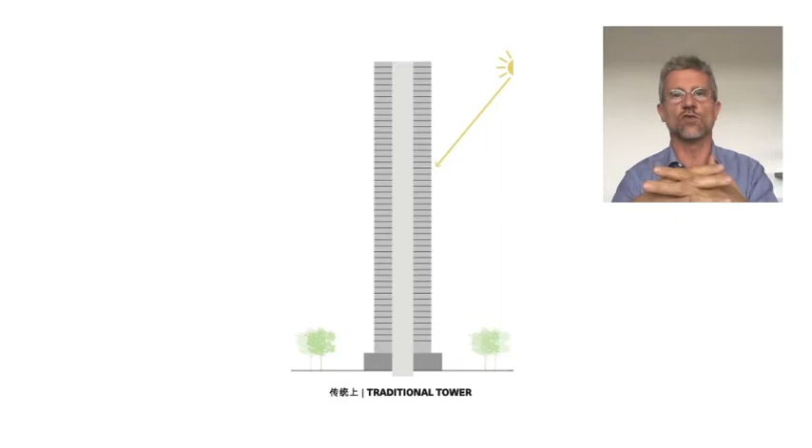We are so happy to have had the opportunity to do this project in Shenzhen. Shenzhen is the city of innovation, Shenzhen is the city of technology and nature, and all of this converges into our skyscraper. A skyscraper which is unique in the world.

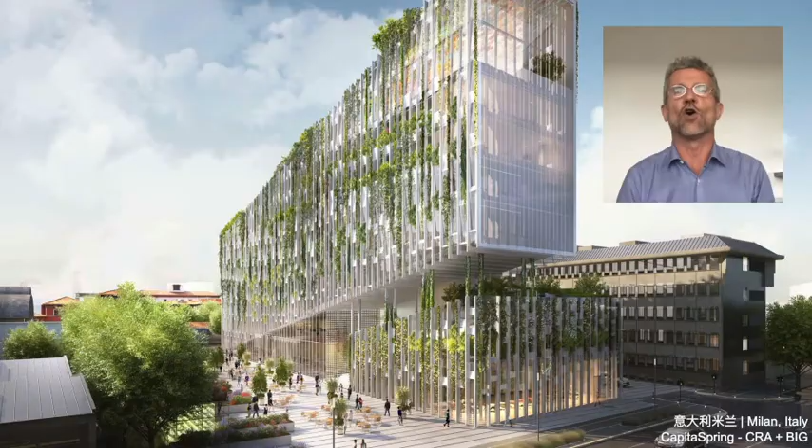It will be able to produce food for over 40,000 people. A skyscraper that's also feasible. It's related to a lot of the projects we've been doing around the world, in Singapore, in Milan, in New York, and so could really become tomorrow an icon for Shenzhen of the future.

WUmart's JIAN MU Tower, as the sacred world tree located in the axis between Earth and Heaven, will be strategically completing Futian CBD's central axis and skyline with an innovative green building. It integrates in the main axis and represents a new attractive magnet on the green network of the CBD, becoming a new destination for both citizens and tourists.

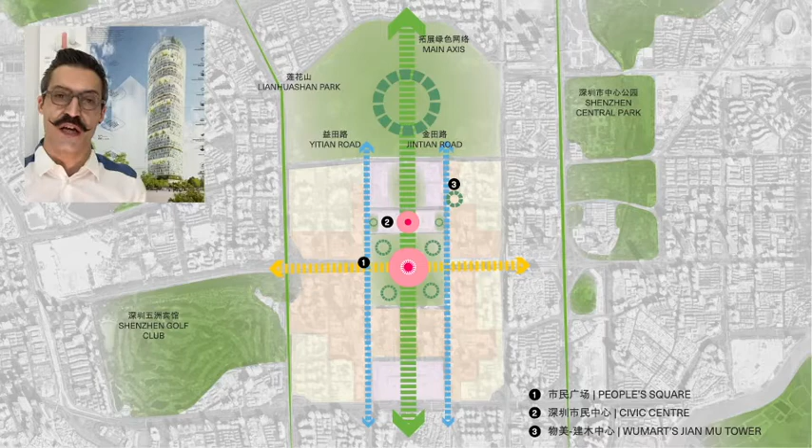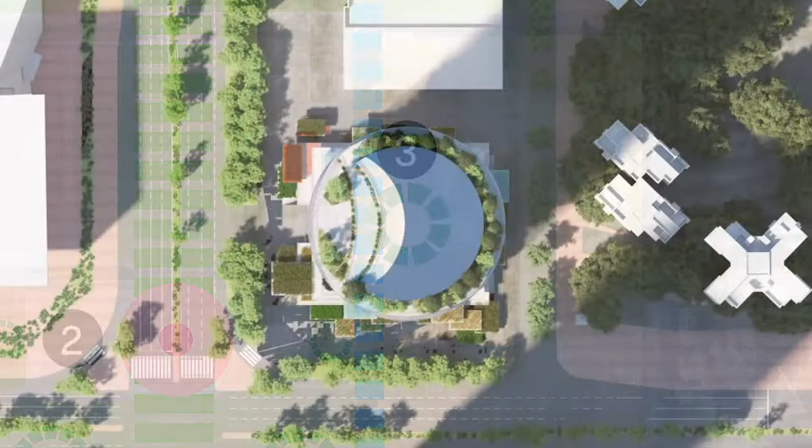It is located on the eastern side of the central axis, in proximity of the civic center, right behind the MOCAPE and a series of public facilities. Therefore, the importance of generating a high-quality public space and a flawless accessibility from any direction.

The project's name is inspired by one of the sacred trees described in the Classic of Mountains and Seas, known as Shan Hai Jing, where it is described as a tree that connects earth and heaven. In Chinese tradition, earth is represented as a square and heaven as a circle.

In our JIAN MU Tower, the shape mutates from a square footprint at the base into a circular open space while growing towards the sky.

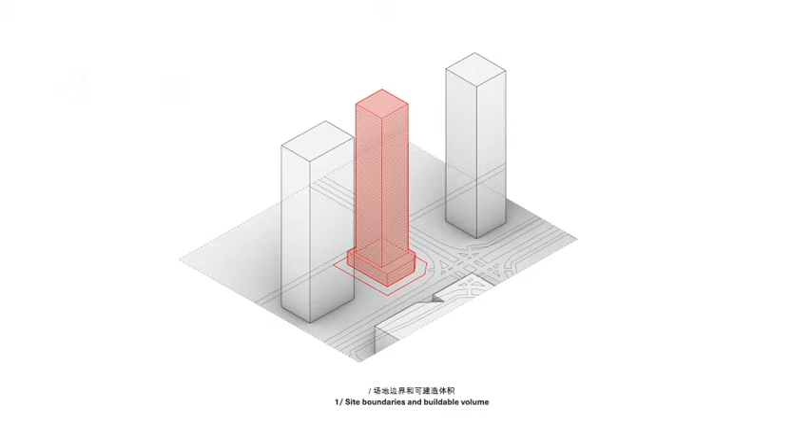The constraints for the building have been carefully evaluated in order to design the most efficient surface for the tower. The site boundaries have been respected, as well as the podium setbacks and the height limits, to better integrate with the existing context and merge with the existing skyline.

The base of the tower is square, so that it can perfectly integrate in the existing urban grid and dialogue with the surrounding buildings on a streetscape level.

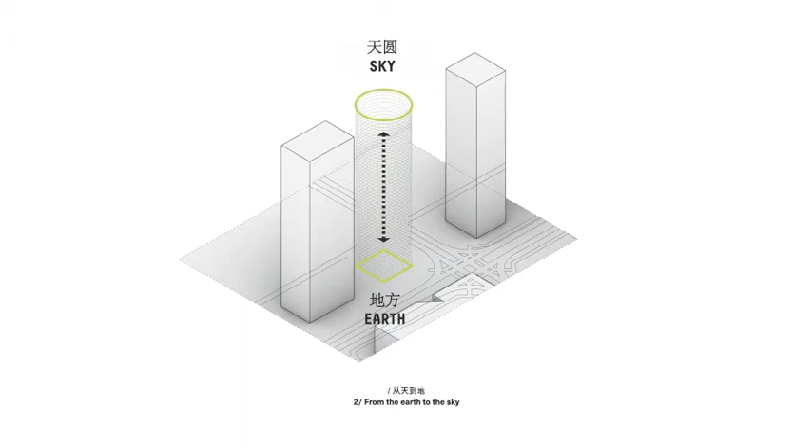The upper level of the tower is a circle, the best shape for nature to grow, ensuring the best view for all the top floor offices, as well as allowing the best flexibility for the smart offices of the future. The unique green facade is one of the tower's main features.

A highly technological, productive facade brings together fresh and excellent food production with clean and cutting-edge technology, showcasing WUmart's image and values. Two suspended gardens complete the shaping of the greenest landmark in the heart of Shenzhen.

A public and accessible terrace garden on the podium enriches the multi-level public space, becoming a new destination. The rooftop garden is a unique and exclusive space dedicated to WUmart and its clients.

When dealing with skyscrapers, shading is typically one of the most crucial issues to be solved. In WUmart's JIAN MU Tower, we don't waste energy from the sun, projecting the city into a sustainable future development. Using solar energy, our green facade will provide dynamic shading while growing fresh and healthy food at the same time.

Our vision is to bring together productive nature and technology in a unique tower that the world has never seen before. The cutting-edge technology involved in the design makes it possible to create a vertical farm facade able to produce food for over 40,000 people every year.

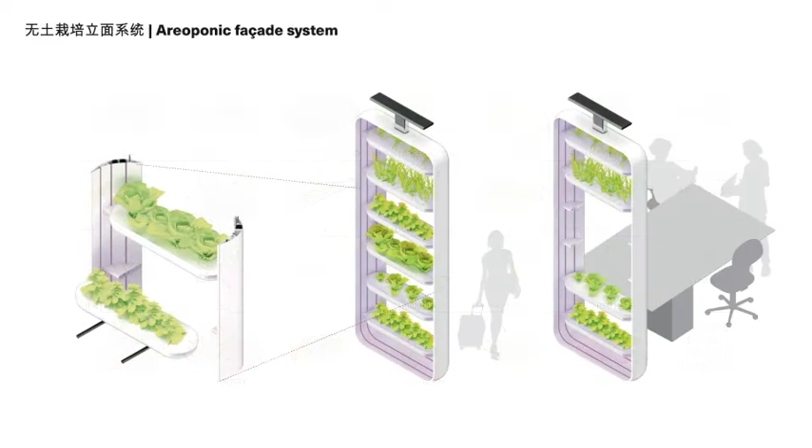The aeroponic system developed is composed of fixed vertical pots the height of a floor, where cultivation trays are stacked. On the outer layer, movable pots slide on the facade and collect the trays to be moved to the harvesting lab or to optimize shading and customize window configurations.

When the building users need more daylighting, shading, open view or greenery for refreshment, they can easily customize the environment by moving the plant pots through the floor track automatically.

The facade system integrates with digital twins and indoor GIS technology that maps the cavity space and activates navigation per user request from mobile devices via Wi-Fi.

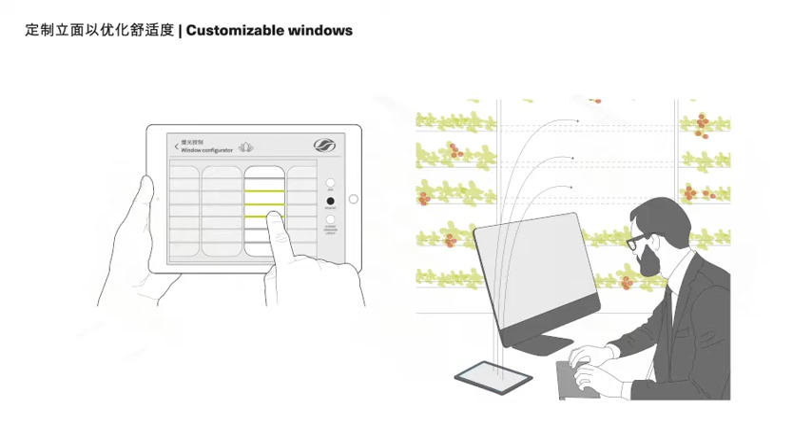During daytime, the plants would produce oxygen. Therefore, the building users could open the vent windows and enjoy the additional fresh air created from the farming cavity, free of any pollution from the outside, providing the highest standards of working environment.

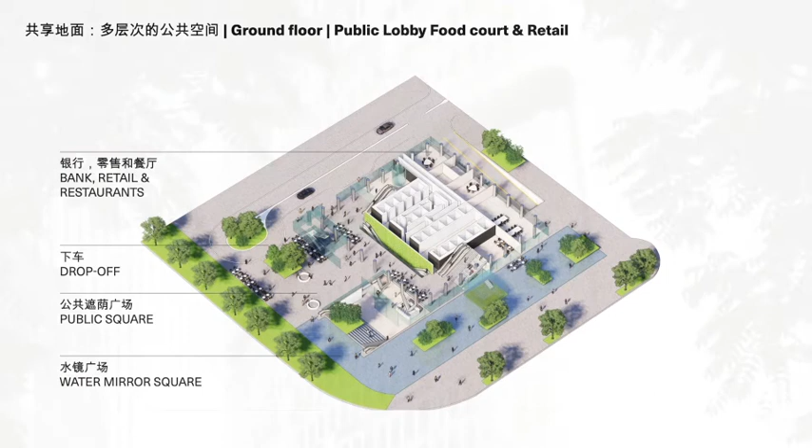The ground floor level is the entrance door of the building, and the aim of the design is to create a system of plazas. Two different public spaces welcome the visitors, one outdoor and one indoor.

Permeable pavement would be used on roadways, sidewalks and pathways to allow water to infiltrate the ground slowly rather than wash off into the local stormwater system.

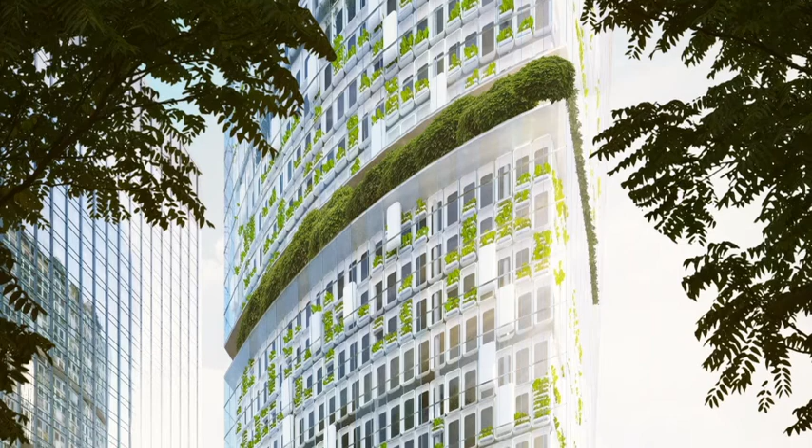Retention ponds and constructed wetlands embedded in our green terraces help catch and filter water, allowing it to slowly percolate into the local water table, strengthening the sponge city effect.

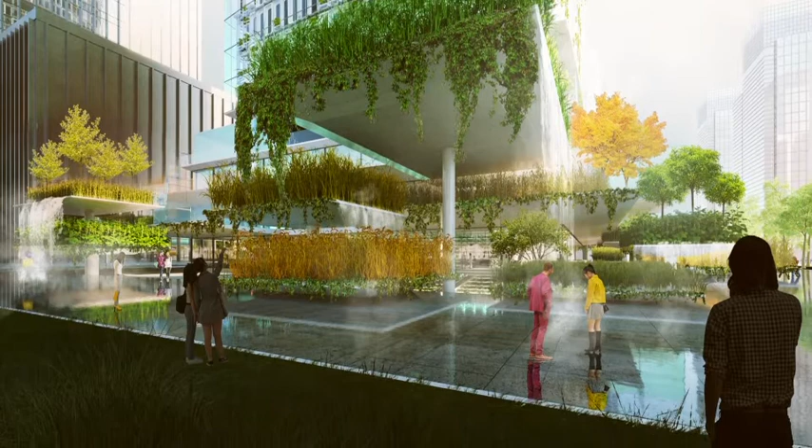A landscape of rain gardens on the street level performs a similar function at a smaller neighborhood scale. The thin watered surface on the sidewalk level, together with the shaded areas under the terraces and green volumes around the podium, also helps mitigate the perceived temperature by up to 9 degrees Celsius.

A modern, high-end lobby welcomes Wumart's clients and employees, while the most advanced technology ensures they live a smooth and pleasant experience. In the multi-level public space, visitors can experience the complete food journey, from sowing to harvesting to shopping to eating. The food production chain is showcased in a transparent, clean and highly technological process.

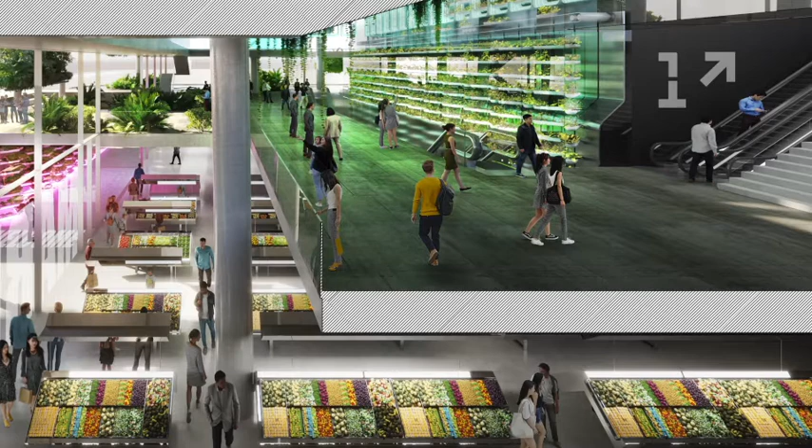Here, Wumart could host their flagship store, a supermarket that sells the vegetables produced by the tower itself. On the roof, it also provides the city with a new rooftop restaurant tailored to make guests feel as if they are flying over the skyline of Shenzhen, becoming a unique landmark to highlight Wumart's image globally.

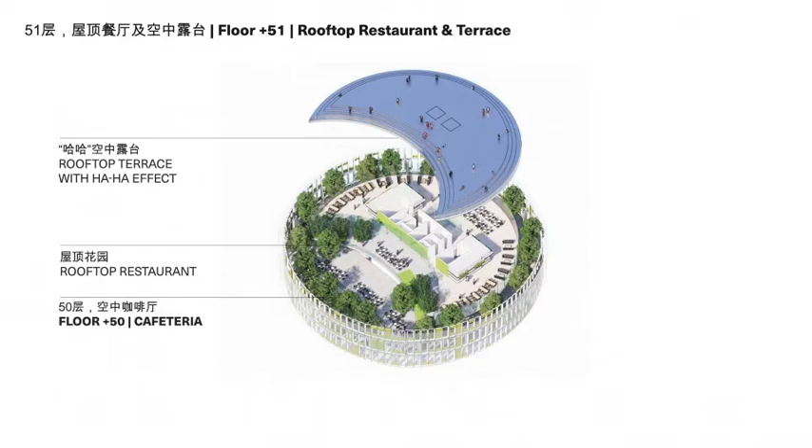A roof terrace enclosed with a glazed screen provides a unique public observatory or VIP venue for events. The rooftop restaurant becomes an exclusive space where Wumart's employees and clients can enjoy a unique view of the city.

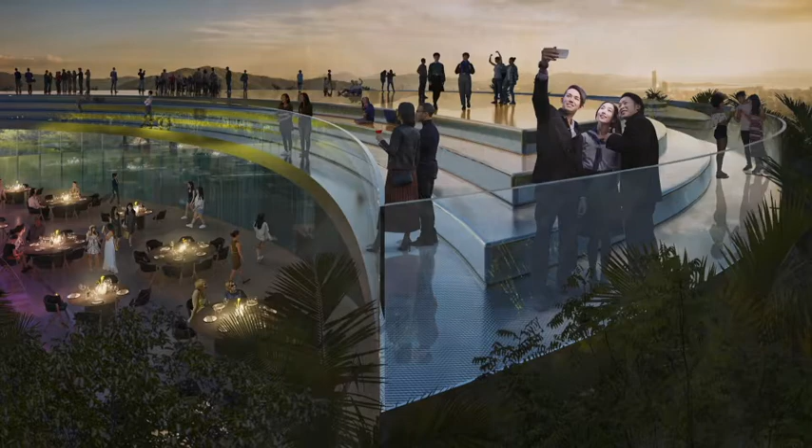Two hidden platforms bring visitors to the rooftop terrace at 218 meters above the city, where they can float over the skyline thanks to the haha effect. This would be the best venue from which to admire Shenzhen's mesmerizing light show, like an open urban theater high in the sky.

JIAN MU Tower develops on 51 levels, divided into 5 vertical zones based on fire compartmentation strategy. Each zone contains 8 or 9 floors separated by continuous open cavities for refuge floors and equipment integrated with green on the outskirts. The facade consists of 2 skins that serve different functions.

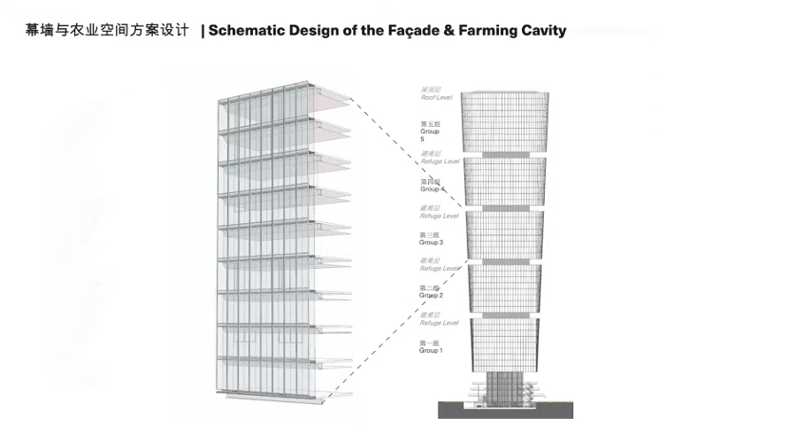The first skin is the main building envelope that protects the building habitat from harsh weather and provides indoor thermal comfort. It is a unitized curtain wall made of vision glass panels, offset 1.2 meters outward from the RC slab.

The inner skin primarily distinguishes the farming area from the office space, and secondly achieves floor-to-floor fire and smoke compartmentation. It is a fire-rated glass and frame proprietary system of which a wide range of designs are available.

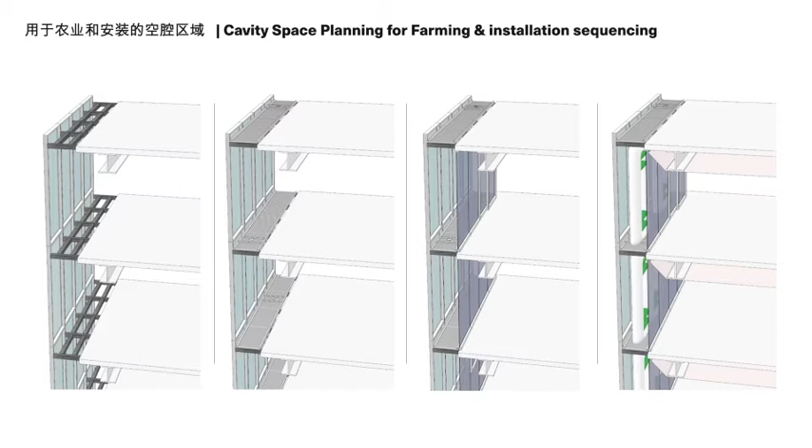In the cavity of the double facade, the system of pods for growing vegetables will be installed. The external glazing will provide solar control through high-performance, low-E coating and plant-optimized PVB interlayer.

We selected high-performance glass panels based on the energy performance defined in the latest Shenzhen city requirement and for China's Green Star Level 3 assessment.

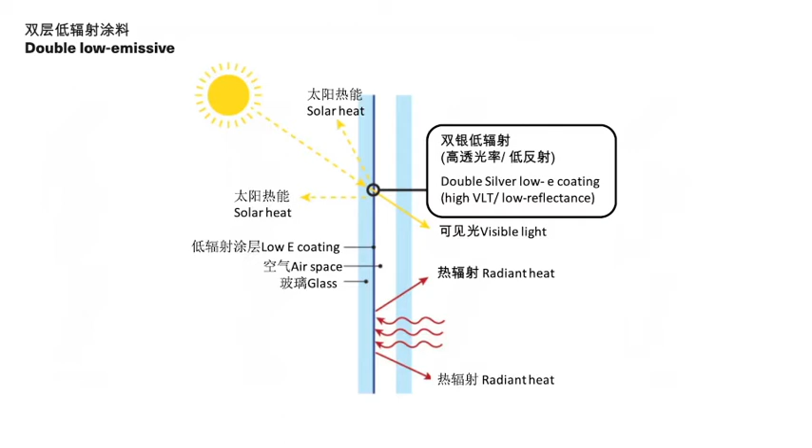The structural system of the building is clean and neat, striving to best match the architectural concept, taking into account the convenience of construction, saving building materials and reducing costs.

The traditional frame core tube structure system is adopted. The technology of this structure system is mature and has been widely used in super high-rise buildings. The structure of the building is composed of outer frame column, core tube and floor beam slab system.

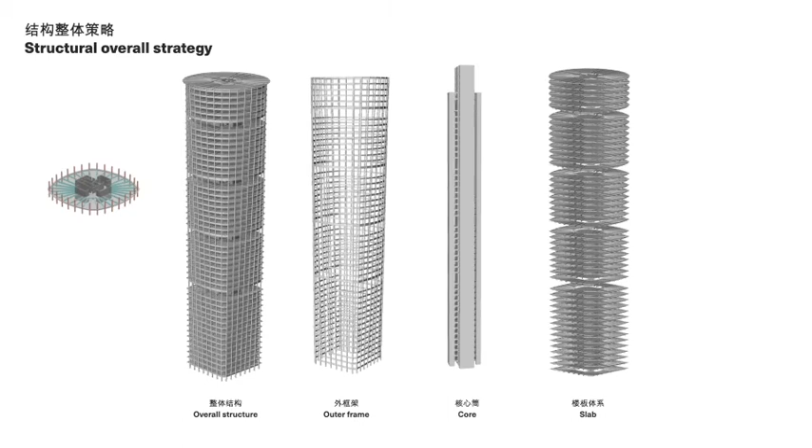The core tube takes into account the needs of structural efficiency and use function, and the plane is cross-shaped. The core tube of the building is made of reinforced concrete, which has good bearing capacity, convenient construction and good economy.

Because of the hoop effect of steel tube on concrete, the bearing capacity of concrete-filled steel tube column is fully developed, so as to achieve the minimum component size and minimum material consumption, and it is being widely used.

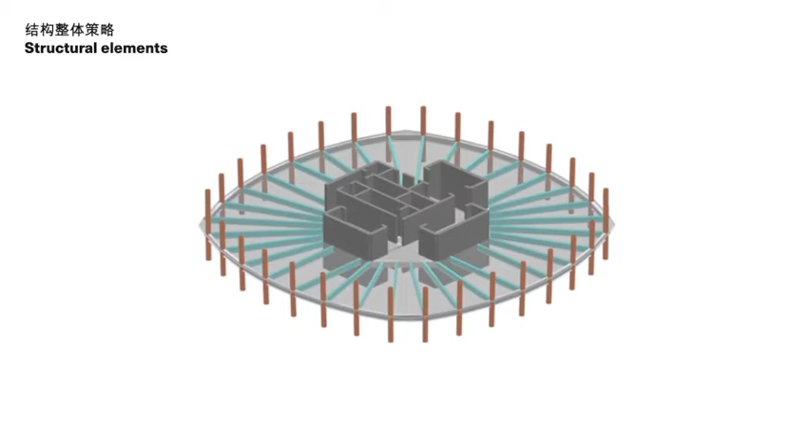The steel beam connection structure is adopted between the columns to form the lateral force resisting system of the structure. The concept of the whole structure system is clear, simple and efficient.

We analyzed the whole structure with our engineer consultants at ARUP, and the results show that the dynamic characteristics of the structure are clear. The interlayer displacement angle of the structure meets the requirement of the design standard. The core tube and the outer frame bear the corresponding part of lateral overturning, and the dual lateral force resisting system is well established.

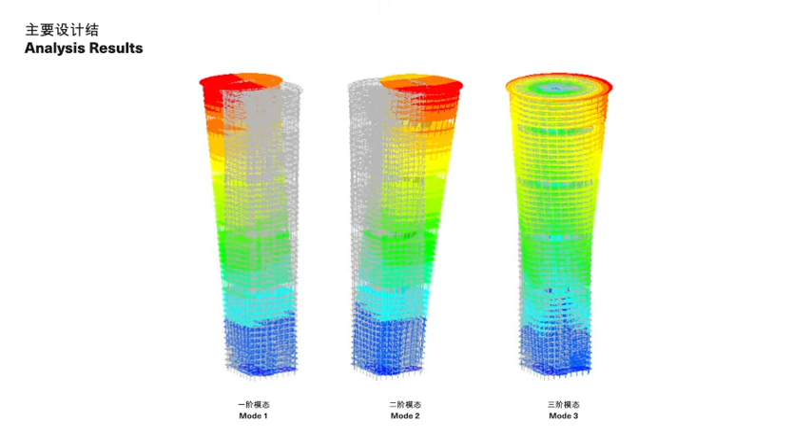Technology is the main driver for innovation, and the new tower will display at two levels, through its main function as an office building and through its complementary function as a vertical farm.

First, every service in the office space will be available through a centralized app, allowing visitors to be part of the experience in the way that suits best their needs each time.

Secondarily, the entire facade is made of automated farming systems, and its products are later sold in the smart supermarket at the entrance lobby. The entire process is automated, from harvesting to collection to purchasing.

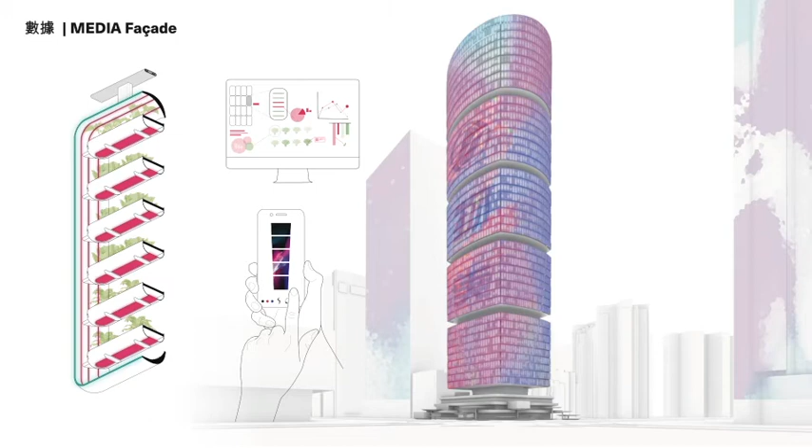We propose to tell the story 'nature meets technology' at different scales, with different approaches, but with the very same consistent design language. Starting with an organic photovoltaic facade that powers the plant lights at night while leaving enough light through during the day. As a media facade, it shows visitors what plants grow and how they are growing.

This information can be accessed from afar, in the lobby, in the supermarket, as well as in the app. The facade appears in different colors, ever changing, based on data from the plants directly next to the LEDs.

The facade could be colored based on growth rate of the individual plants, plant type, or CO2 absorption. It can be programmed and controlled to showcase WUMART's logo, corporate information, as well as perfectly integrated with the surrounding buildings for being part of the light show.

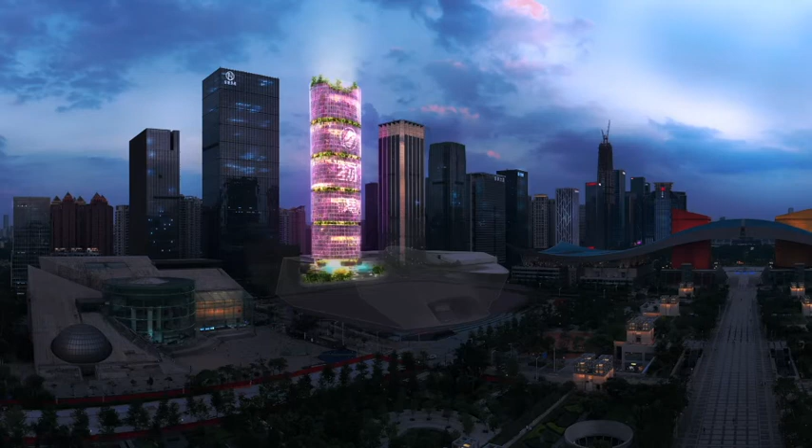Considering Shenzhen the fulcrum of latest technological advancement worldwide, there is no better city to deserve the very first large-scale food-producing building in the world.

Not only as a milestone for the success and rapid growth of WUMART, witnessing the Shenzhen speed expansion as a unique expression of locally produced technology, but ultimately projecting the city into sustainable future development.

WUMART is one step away from making an historic leap through realizing an iconic building, achieving a miracle today that will become a new normal tomorrow, in a city that is envisioning itself as a testbed to create the model city of the future.